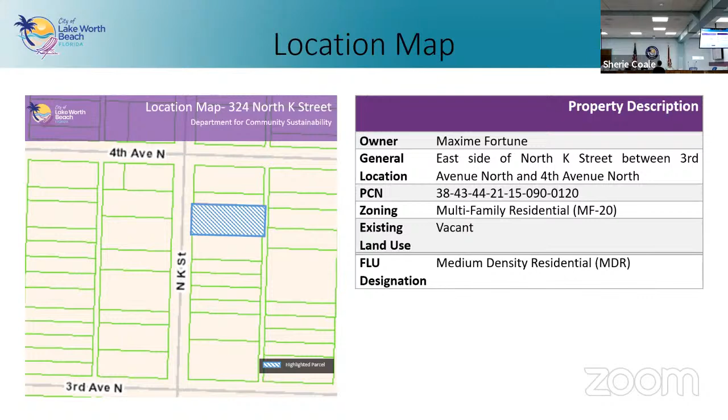Here's our proposed site plan. You can see the layout of the driveway, garage, home, and then pool. The pool is technically not part of this; that would be a later permit.

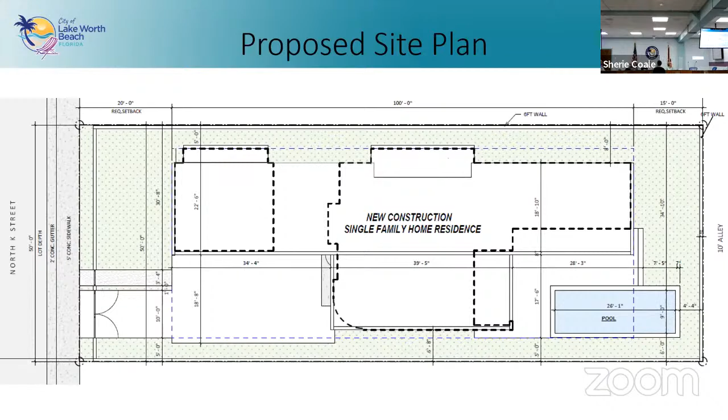Here's our streetscape. You can see that the proposed home is taller than the immediate neighbors. Most of those are one-story houses, but it is similar in height to other two-story buildings down the street, as well as two two-story buildings directly across the street from it.

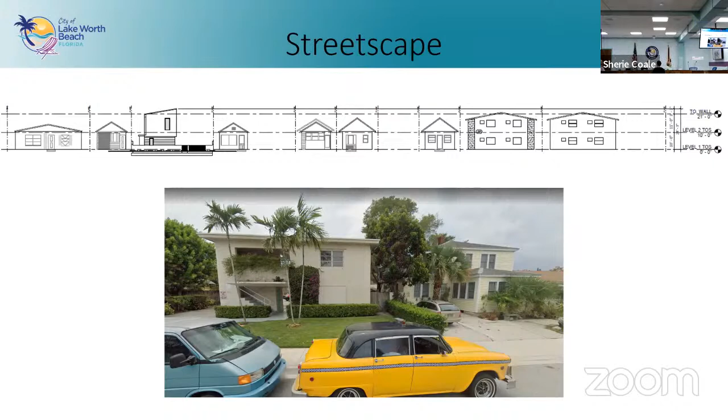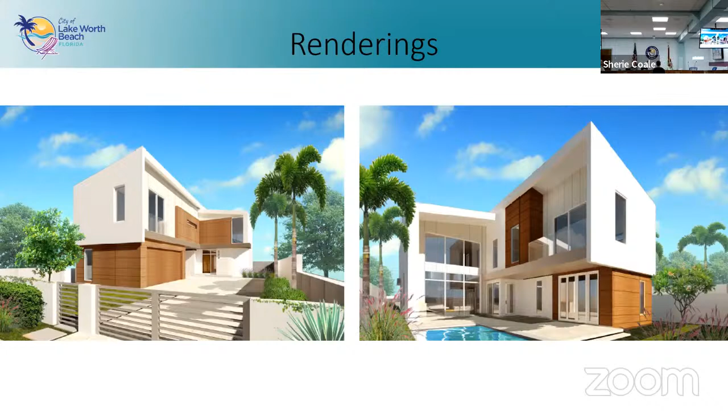Here are our renderings. You can see it's a very modern structure. As the applicants described, they're going for a contemporary rendition of a mid-century style. Here are our elevations, showing the front and the rear, and our side elevations there.

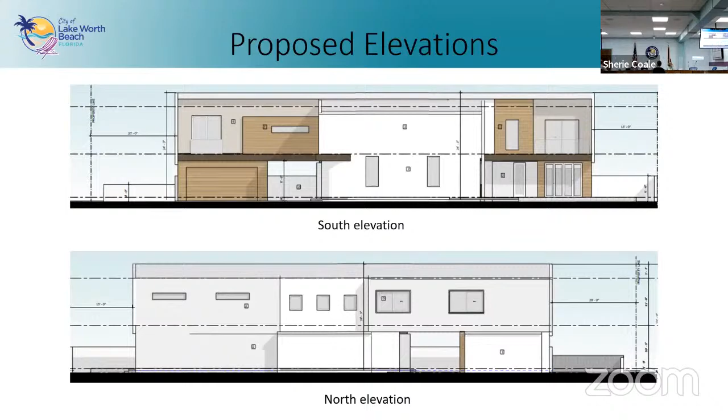For zoning, it's consistent with all of our site data requirements, except for the maximum floor area ratio. The applicants have chosen to utilize the sustainable bonus program to get some additional FAR.

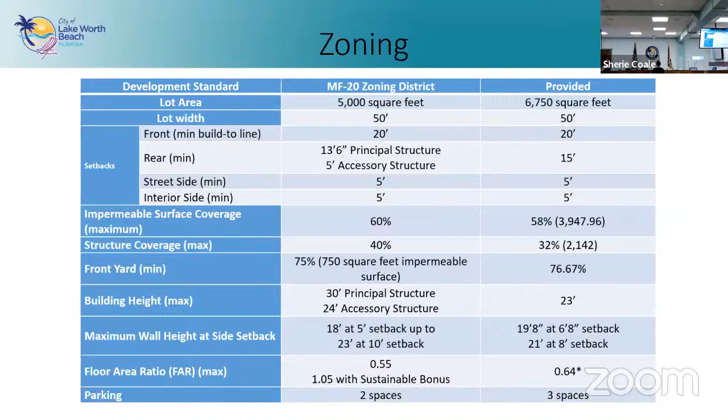So how that works for us in the MF20 zoning district, where this property is, applicants can get an additional 0.5 FAR through the sustainable bonus incentive program.

Based on our calculations of the additional square feet requested, the required award value is just over $4,700. They must pay 50% of that to the city, and the remaining 50% could be provided through qualifying improvements or paying the rest of the fee. Per the applicants, they are choosing to pay the full fee to the city.

Getting into our new construction guidelines, the building is a contemporary rendition of a mid-mod. For things like the roof, they're choosing this skillion and lean-to shape, which is compatible with the style and helps it fit better with the front gabled structures nearby.

The height, as we've talked about, is taller than a lot of the immediately adjacent buildings, but it's not unusual for this block. There are plenty of other similarly sized two-story buildings nearby.

In terms of fenestration, in general they're doing okay, but staff has added a condition of approval to add 2 additional windows to the street-facing elevation so it's not so much blank wall facing people as they're going down the street. As for the stucco, it's very common and compatible within the district and for the style they're proposing.

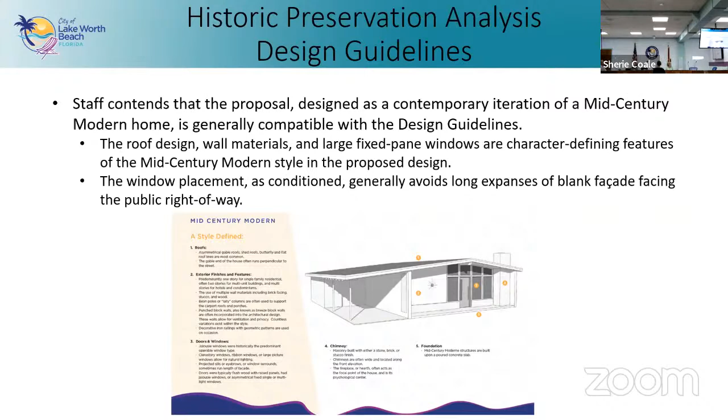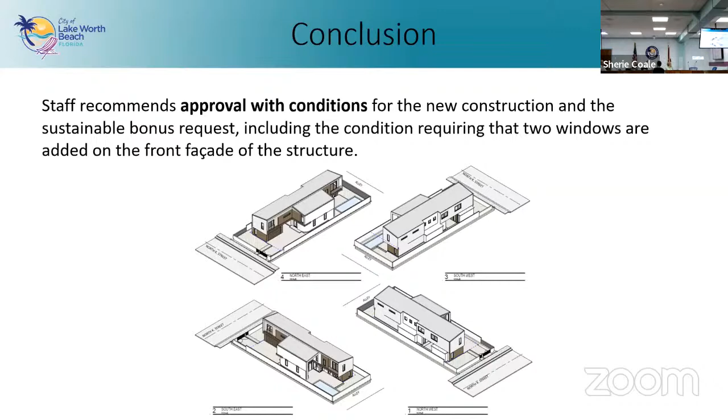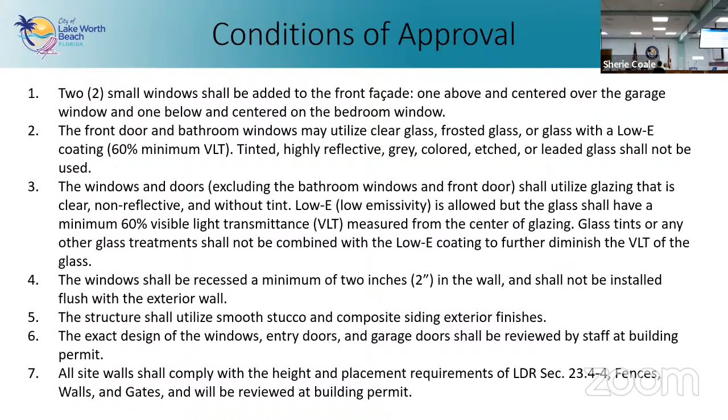Okay, does the applicant have any presentation?

Hi, good evening. Giorgio Antoniassi with Antoniassi Architecture. I'm here representing Maxime Fortune for his single-family home on North K Street.

I just would like to mention that we've done our best to create a thin structure that would mimic the adjacent shotgun-style houses on that same street. We understand that we're not really matching that typology that is apparent on both sides of us.

However, we are providing a face to the mid-century modern multifamily across the street that has a very opaque face as well. So in terms of the harmony of the street, we're kind of matching what's in front of us, and by providing a thin front with a driveway and side entry into a garage...

We managed to try to create a thinner building instead of a full width building that could be on the 20-foot lot line. We think that helps this building interrupt that line of shotgun houses on that street.

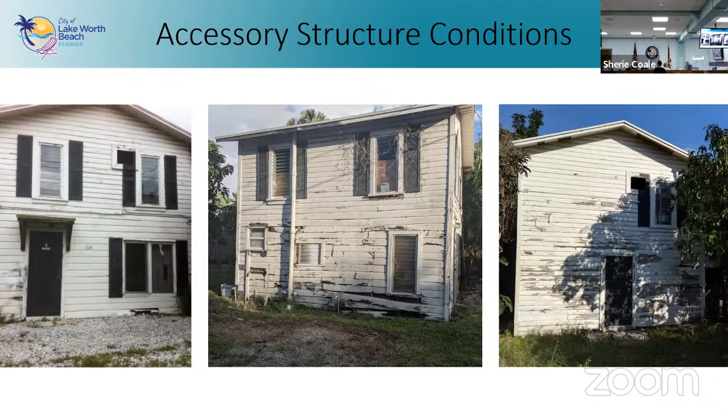This replacement determination made by our building official triggers compliance with the zoning code. To mitigate some of the zoning requirements not met in this historic structure, they're requesting 2 historic waivers. Those waivers would permit the structure not only to exist in its current location, but also its current size, and be functionally reconstructed as it existed for 100 years.

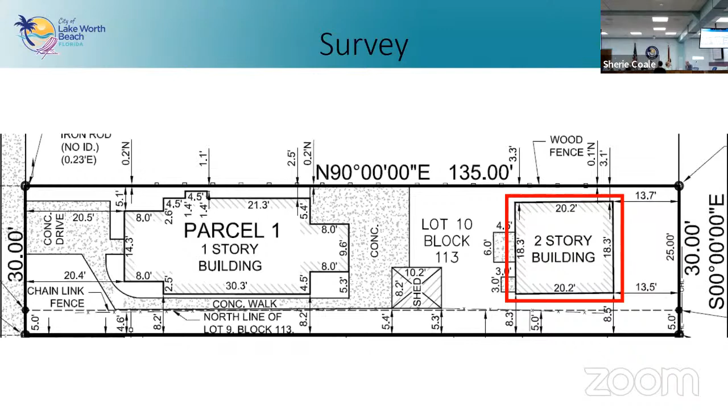If we'll go next, you can see the elevation drawings on this and the next slide. Basically, the structure itself is not changing, it's just the inside of it needs so much work that we need these waivers. The lot is 30 feet wide. Next, please - these are the other 2 elevations.

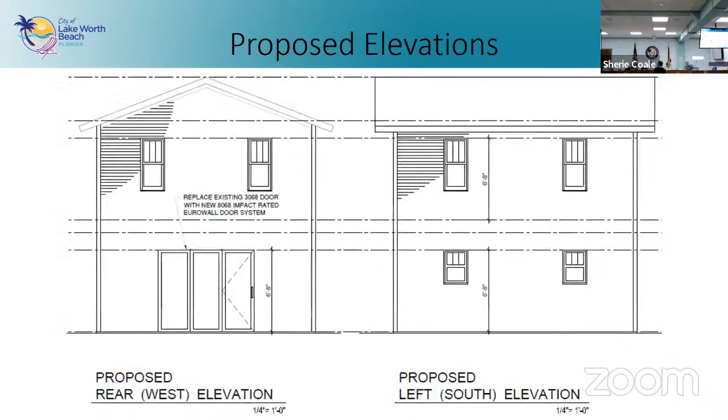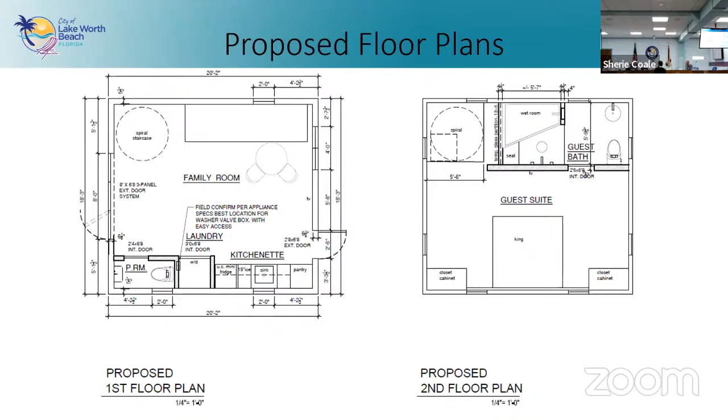If you'll go next again, we've got our floor plans to turn this into a functional guest house, with a kitchenette, guest suites, and bathrooms. So here are our 2 waiver requests, and this is kind of the meat of your decision tonight.

It meets all of the zoning requirements except for the maximum square footage of the structure and that north side setback. Required side setbacks for all 2-story buildings is a minimum of 5 feet in our zoning code. The existing north side setback is 3.1 feet. Accessory structures are currently limited to 40% of the gross square footage of the primary structure, and this existing structure is at 94.4%, largely because of that second story that has always existed.

I will add that there have been cases where the waiver didn't exist and people wanted to reconstruct something, so what they did is connect it with a breezeway. The waiver allows it to be reconstructed as a functionally distinct structure as it was historically. They could rebuild, maybe not in this exact location, but if the waivers aren't granted, it'll be demolished. It doesn't have to be demolished.

They're rebuilding the building. It will have to be demolished if you don't grant the waivers. So what we're talking about is getting these waivers so they can do what we consider a functional reconstruction, where they're not tearing the whole building down and starting fresh. It basically means that over 50% of that structure interiorly will have to be replaced because of water damage, rot, that sort of stuff.

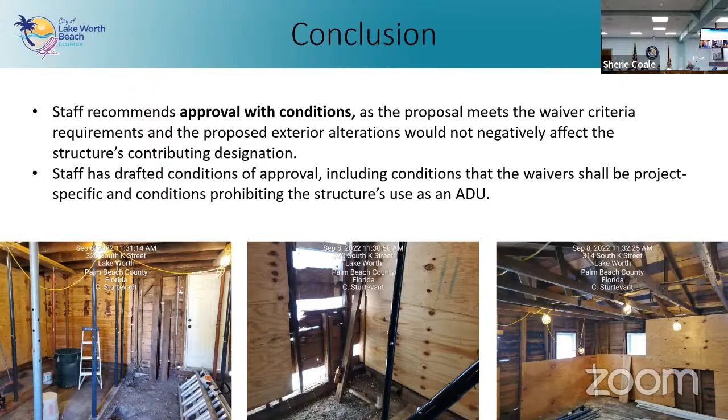So I see there are conditions of approval specific to this particular project, not just boilerplate. Does the applicant have any issues? I don't believe the applicant is here tonight, but most of the conditions addressing doors, windows, and all of that—they've been privy to. Those were part of the previous approval given prior to this structural issue coming to light, so they're amenable to all of those.

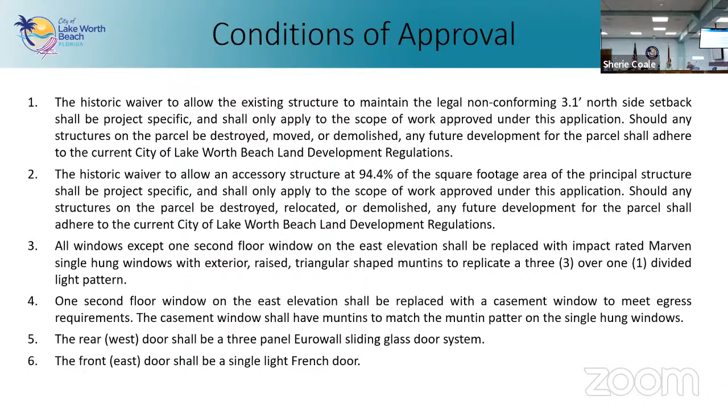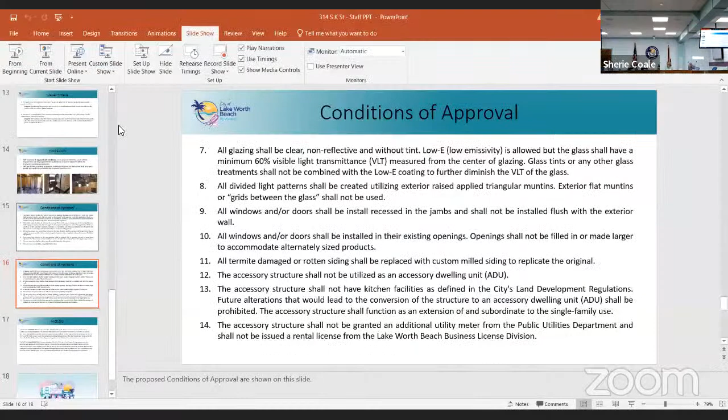Okay, do we have any other comments or questions on the project? What is the full structure then? Yeah, that front structure, you might recall, went before the HRPB for rehabilitation in 2017, maybe. 30-foot wide, yeah.

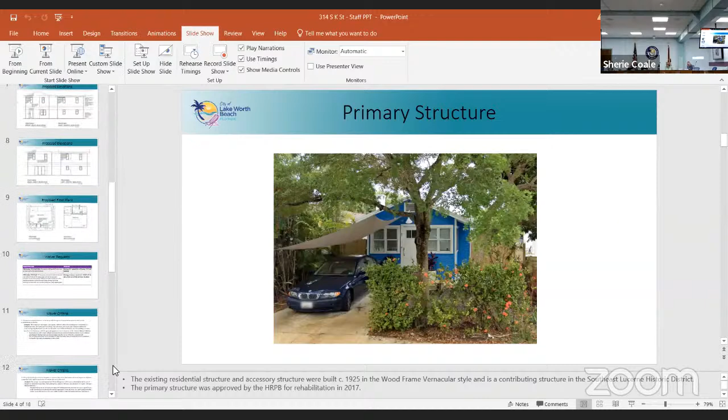And the floor level of the rear living space downstairs—is that anywhere near what it should be? No, I'm not talking about bringing it up to whatever the requirement is, but do we have any idea? It looks like it's sitting almost below grade.

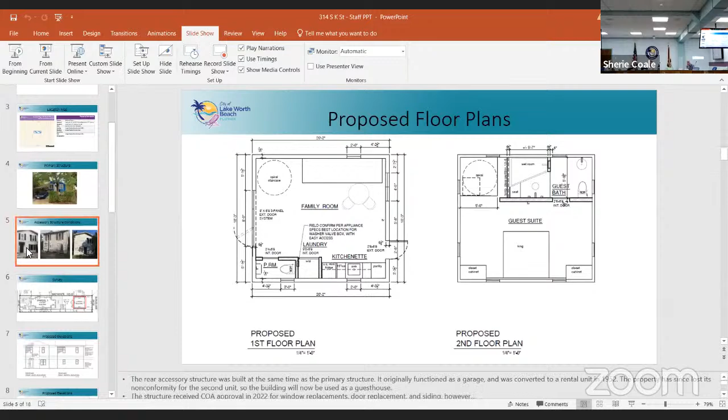Staff is recommending that we approve it. If they have a finished floor elevation issue, they would be required to retain the doors in their same position, then step up into the house. Obviously the doors have to open outwards in Florida. But there's a flood adaptation where you internally adapt the structure and raise the internal floor to meet habitable space while keeping the exterior facade. It could just need a little extra lip, with the door opening outwards below the finished floor elevation. That's an easy adaptation we can handle at permitting.

Any other questions or comments? No. All right, do we have a motion?

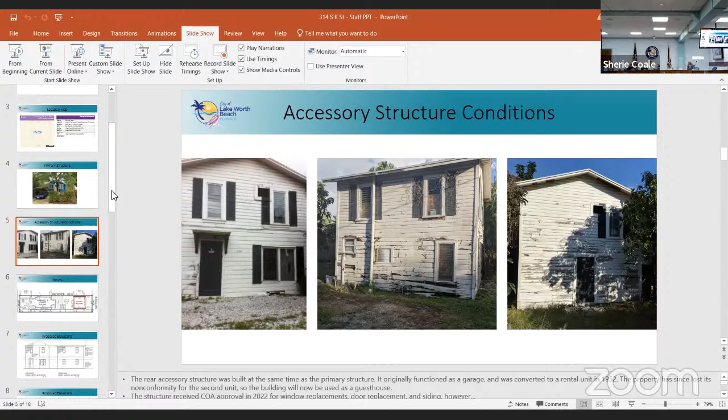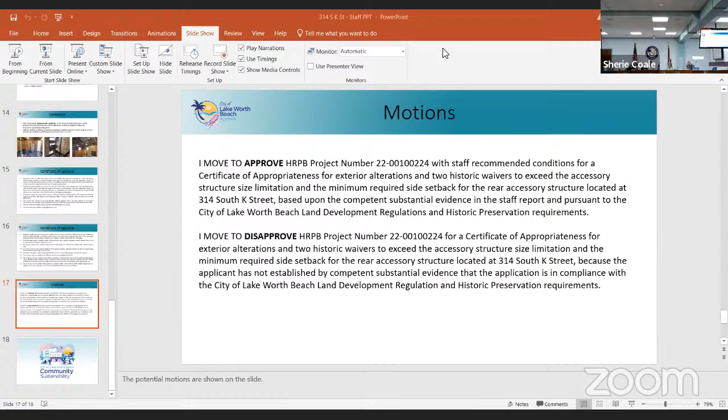I move to approve HRPB project number 22-00100224 with staff recommendation, recommended conditions, with certificate of appropriateness for exterior alterations and two historic waivers to exceed the accessory structure size limitation and the minimum required side setback for the rear accessory structure located at 314 South K Street, based upon competent substantial evidence in the staff report pursuant to the City of Lake Worth Beach Land Development Regulations and Historic Preservation requirements. We have a second.

Second. Good, we have a motion and a second. All those in favor say aye. Aye. Opposed, nay. Nay. One opposed and four approving, so it passes.

HRPB project number 22001003, for consideration of a certificate of appropriateness for the demolition of existing structures and construction of a new 2,890 square foot single family house at 338 Cornell Drive, West Lot. Subject property is located in the single family residential zoning district and has a future land use of single family residential. Property is a contributing resource in the College Park National and Local Historic District.

Awesome, so once again this is Annie Greening, Senior Preservation Planner for the City of Lake Worth Beach. So our property here, you may remember it has come before for conceptual review. This is on Cornell near North Dixie Highway. If you could go to the next slide, Erin.

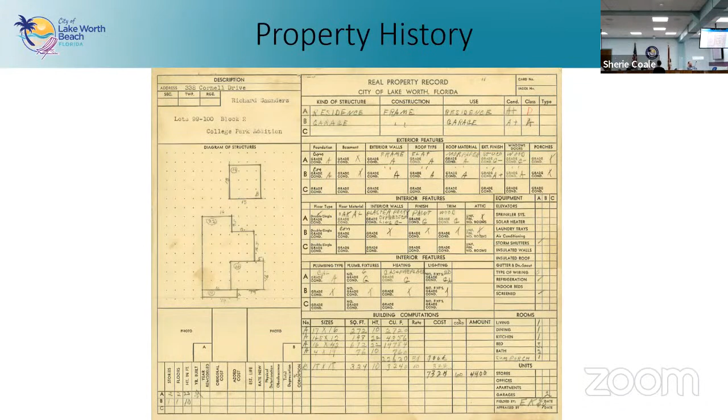So some property history, since this is a demolition and new construction, we'll go into a little more detail. College Park was originally platted in 1924. This property was platted as four 25-foot lots, and the existing house and garage were built in 1925 in the mission style. This was one of the most common styles in the College Park district in that era.

Like I said, it came before you all in September 2022 for conceptual review, and in October, the applicants did receive a zoning letter deeming the request to split the parcel into two 50-foot parcels, subject to your approval of the demolition and new construction.

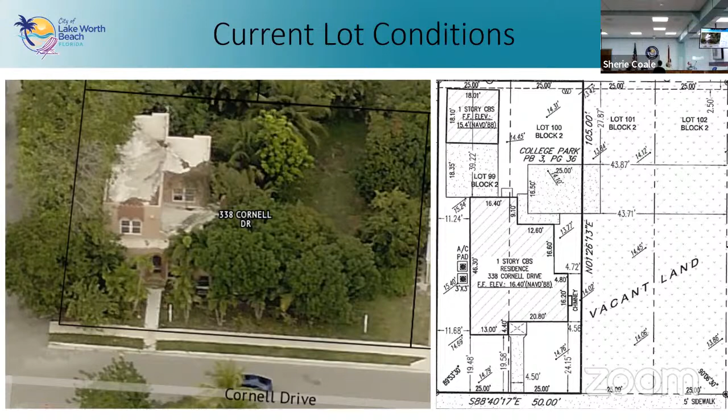So we are here. You can see kind of a 3D view as well as the existing survey for the property showing the structure and the garage in the rear. And so next, please, Erin.

So we're going to walk through just kind of the highlights of the demolition request. These were covered in the staff report as well as the applicant's justification statement. But these structures at 338 Cornell are contributing to the College Park National District. Staff has contended that they are unlikely to qualify individually as individual landmarks. And there are other remaining examples of this style in the city, so these aren't the one and only that we have here.

But next slide, please. Despite the current state of the building, staff believe that they do still contribute to the historic character of the district that they're in. They represent not only these styles of the era, but the Florida land boom and the associated development that happened in Lake Worth and throughout the state during that time. We do believe that the loss of these structures would be a significant loss for the district. This is a prominent residence, 2-story on a somewhat prominent location.

The applicant has agreed to document the building prior to demolition if you all approve that demolition request, so that we have record for the future of what was once here. And staff do believe that retaining the structure would provide an opportunity to study local history, architecture, and design, which is one of our criteria that we would like you all to consider for this demolition.

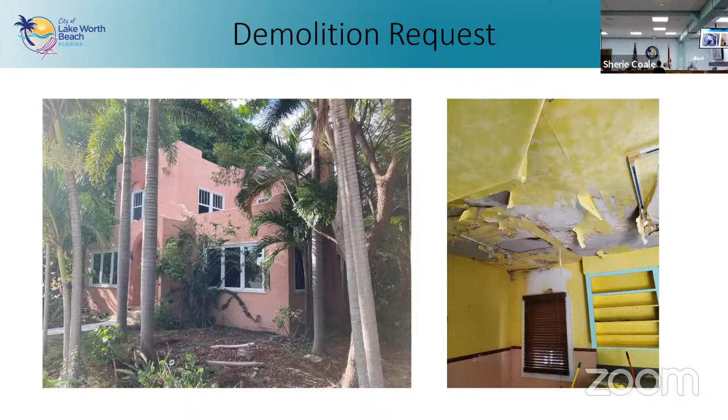So repair would likely be expensive, and staff does refer or defer to our applicants regarding issues of economic return or economic hardship. Those are considerations in your demolition criteria. But at this point, no specific evidence regarding either of those economic arguments has been submitted.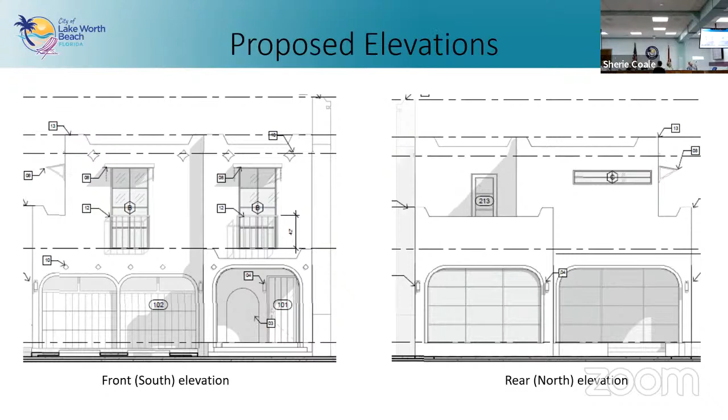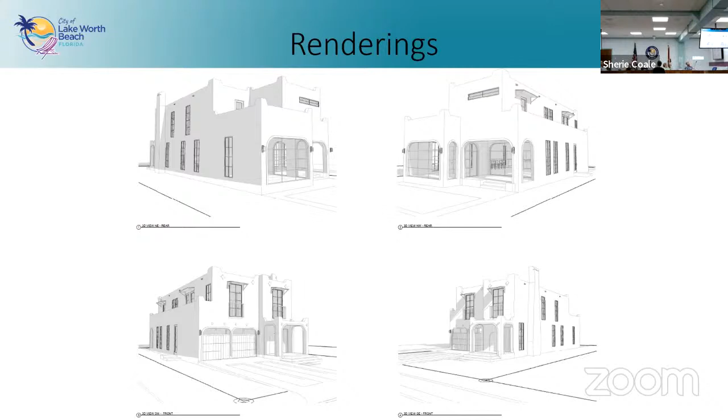Additionally, we wanted to note in this zoning section real quick, while the site does meet its parking requirements based on the driveway spaces, the size of the garage internally is not actually long enough to meet our parking requirements. So we have added a condition of approval as well to increase the length of that parking garage so you could fit a whole car in.

Yeah. Okay, so moving again back to preservation out of zoning. We have our additional guidelines for new construction.

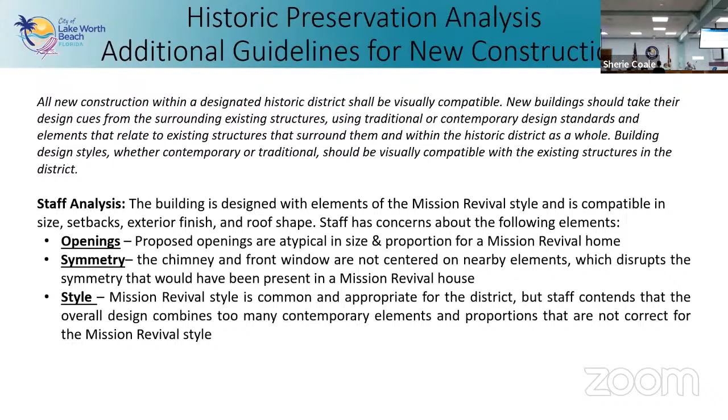Staff believes that this building is designed with elements of the Mission Revival style, the same style as the building it's replacing. It's compatible with many elements—size, setbacks, exterior finish, roof shapes—but we have concerns about size and proportion of openings, the symmetry of certain elements such as the chimney and some windows, as well as the style overall. Staff feels like it combines too many contemporary elements to feel authentic and true to the Mission Revival style.

If you go one more slide, Erin, we've got our design guidelines analysis that gets a little more detailed. Like we've talked about, we're seeking truth in architecture—emulating a single style and incorporating all of the correct window proportions, massing, symmetry, and materials, to make it feel authentically the style it's supposed to be.

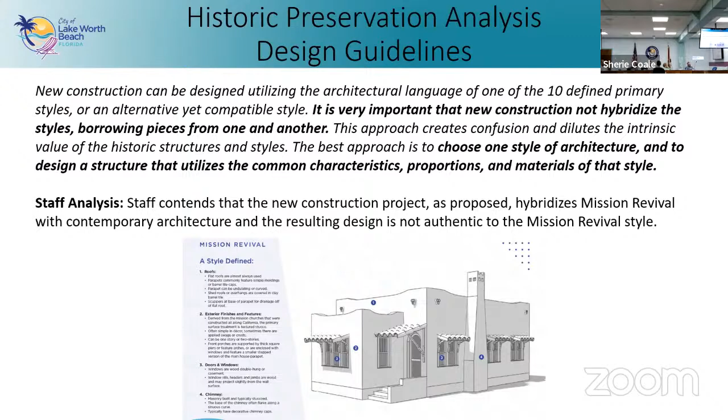If we go to the next slide, Erin, these are some of staff's concerns. Windows are out of proportion—historically, windows weren't floor to ceiling, those would have been doors. The first and second stories were the same height as each other, which gives a top-heavy appearance and is not how buildings were historically constructed. The thinness of the parapet on the entry porch was also atypical.

We also had some concerns with the balcony and how it affected symmetry on the front of the building. So we suggested shifting some elements so that the balcony is not visible from the front. If you go to the next slide.

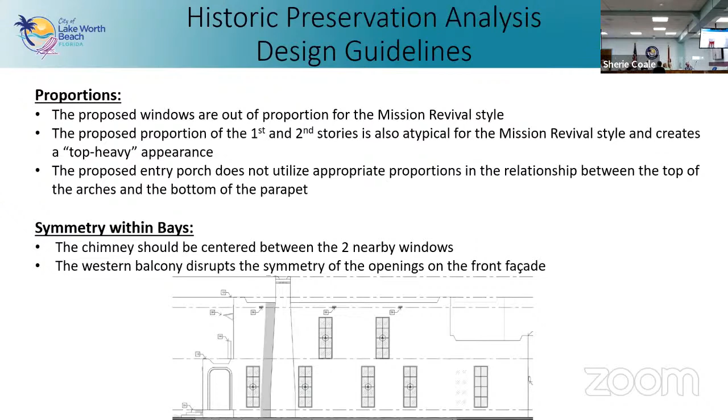We also had some questions about the muntin patterns—again, atypical for the style they're emulating. And then the arches—most of them are this kind of flat arch with rounding at the corners. This is evident in this style sometimes in vehicular uses, like carports or garages, but we had concerns with that shape for the entry porch and suggested using smaller rounded arches instead. This is a rough sketch just to give you the idea of what we were looking for there.

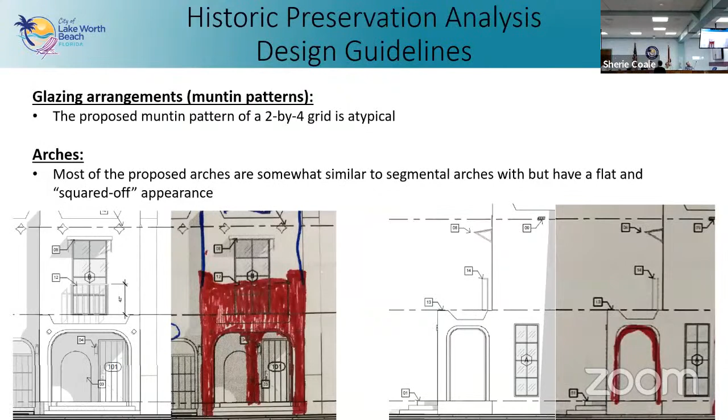If you'll go to the next slide, Erin. I wanted to add that part of it is to make the balcony a functional balcony by making the front element more prominent, which would have been more historically typical than what was provided by the applicant. Even if they didn't want to make it so you could literally walk out on it, it should emulate what would have been a functional balcony.

The applicant did provide staff with some revised drawings this morning and indicated they will potentially show some more revisions tonight as well. Staff hasn't had the opportunity to do a full review of them, and I know they weren't included in your packet either, but they do seem to start to address issues of proportions and the front porch parapet, that sort of thing.

So it is encouraging. If you'll go to the next slide, Erin, we do have continued concerns about a few things. The width between the arches on that front porch is still really thin and feels a bit off. The arch on the other side of that porch isn't matching. And we had some questions about that large arched door on the west elevation, some asymmetry in the muntins, and it seems to be lacking a stoop to walk out on.

The applicant has been amenable to start making some of these revisions, but staff still believe we need some more time—the applicant might need some more time, and you all might need some more time—to get fully revised drawings in for our review and your review.

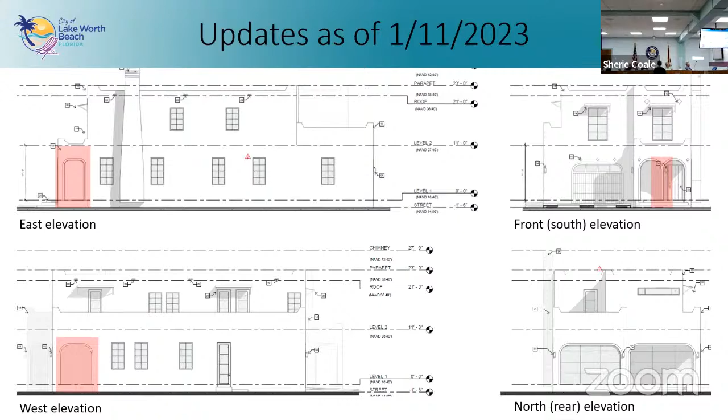So if you'll go next, Erin, we recommend continuing this project to another meeting. This just gives everyone a little more time to implement some of these revisions, whether that's staff comments or any comments you all might have tonight. We're particularly concerned about getting this one right since it's potentially replacing a National Register listed building. If we're replacing it with the style that was here originally, we want to do it right.

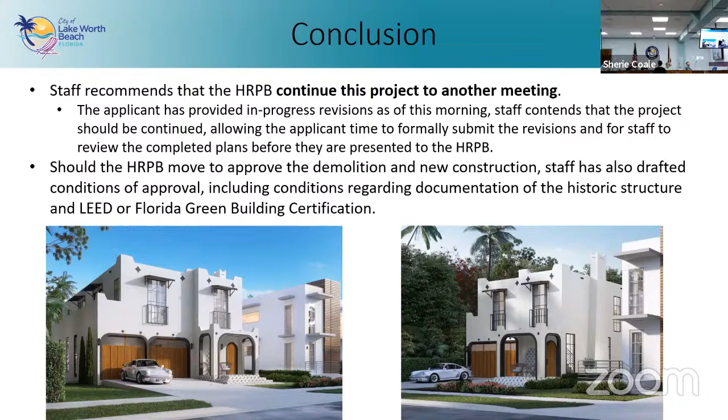So if you all so move, we do have conditions of approval that we've also included that could be added or edited. But we had those there in case you all felt comfortable approving it tonight, though we do recommend continuing it. As usual, the next slides just have our conditions of approval as well as our draft motions.

Yes, but it's not quite there yet. We've got to give the applicant a chance. No, you'll get there. Okay.

Our applicant's representative is here, and the architect is also here on Zoom tonight.

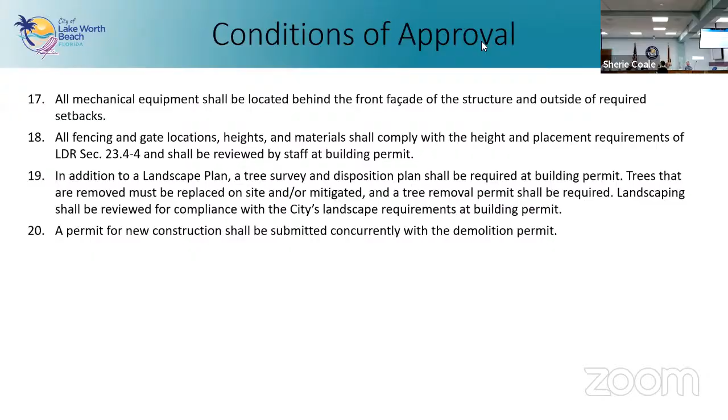Before we move forward, are we debating or discussing the demolition and this replacement at the same time, or separately? They're concurrent. So in order to approve the new construction, you have to approve the demolition. And it is a unique case when there is a National District - you do have additional authority because it rises to that level.

Okay, we'll move forward with the applicant. Wes, did you have a PowerPoint presentation? No, I didn't. Okay, good, we'll just refer to the staff report. We need - Stephen has some graphics too he can share. Hold on one second, let me just pull that up.

Good evening, how are you? Happy New Year. Wes Blackman, AICP Certified Urban Planner with CWB Associates, here representing and on behalf of Emerald Isle Home Builders, who is the owner of the property. This is an application for demolition and new construction.

After hearing the staff report, we agree - we're on the same page with staff concerning consistency with the comprehensive plan and meeting the standards of the SFR zoning district. We're doing a Florida Green Building certification that allows for a small increase in FAR. We also agree with the findings and suggestions in the report for new construction in historic districts, and we take the comments from staff on architecture style very seriously.

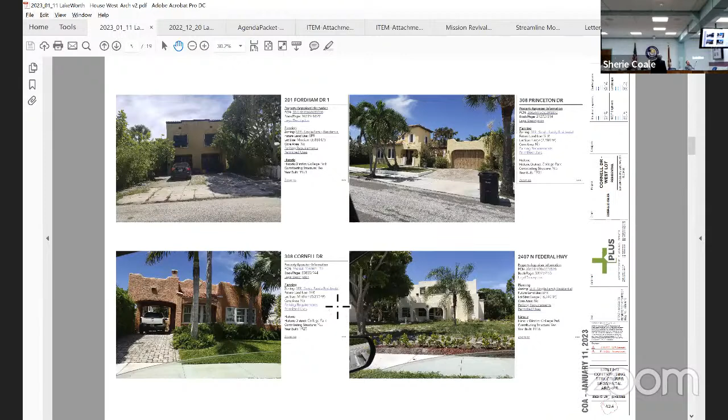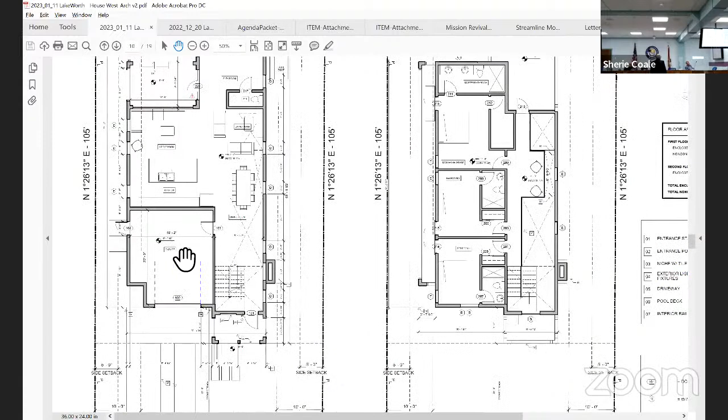Precedent in terms of our design decisions, precedent in terms of the arches that were used in Mission Revival, the site plan, the floor plan initially the way we had it, the floor plan how we have changed it. So if you can see, it shows the notch, making it a 1-car garage, pushing this back to have the 20 feet as per your request.

So that's the change in the plan. Basically, again, the initial proposal that we had, the studies that we did with the arches as well as a proposal. The new, and I guess the most updated versions, are these. So we've changed the proportions of the windows as per your request. We increased the size of the parapet, the space, the parapet. We pushed back the balcony, creating that notch. We made it a 1-car garage, centering the window as well.

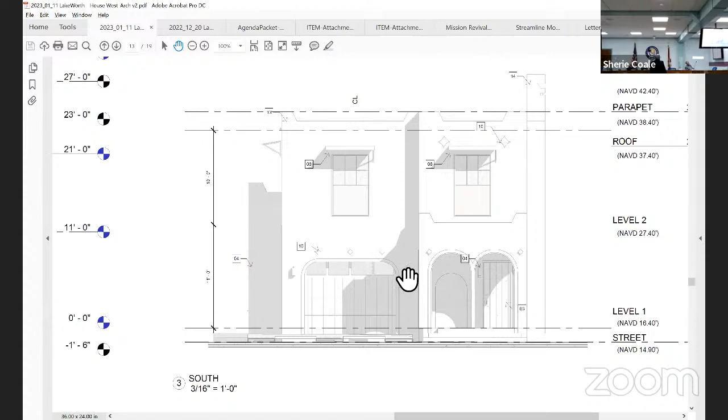Something that you didn't have updated was the arch on the corner has that same arch. What else? I think those were all the updates. Centering of the chimney, a lot of miscellaneous things, and changing the centering of the chimney, basically, and in between the windows.

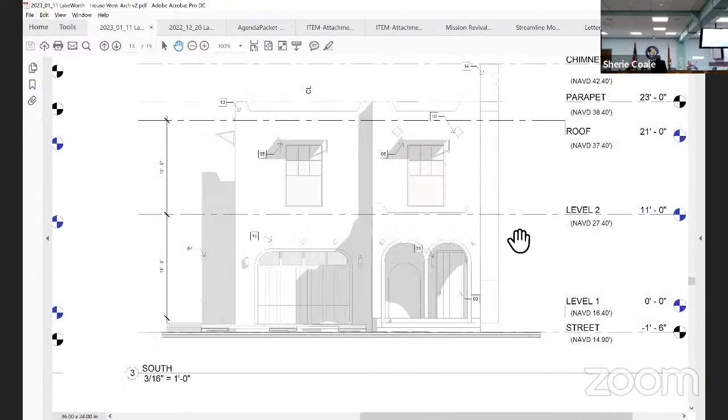And you had a concern about the double section there. Yeah, so the double arch was something that we had said would be a good alternative. It would give kind of a consistent arch size throughout. It's just that connector bit between the two of them is really thin, which is a bit atypical. So if it was widened a bit, it would make the arches smaller, but it would give the sense of weight that would be historic. 6, 8 inches a foot.

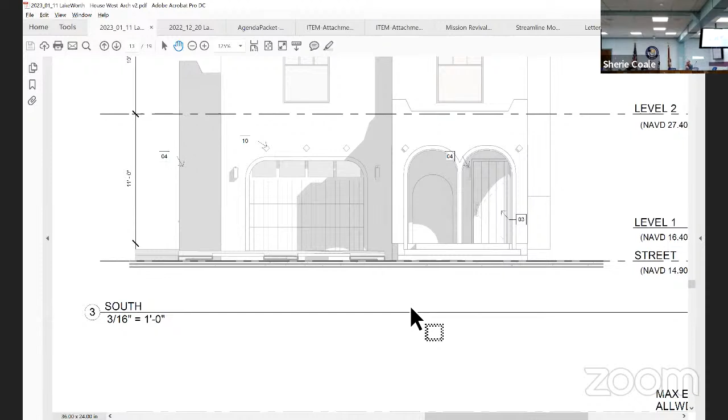We need to, see, this is the problem: it's hard to design at a meeting. So if you guys are comfortable with staff making those decisions, what we would say is you would concur with staff's direction that it needs more weight, and then we would have to work it out with them, because there might be something else that comes up in the design. And then we're like, well, we could add more weight, but then that makes that weird, and then we got to change that. So this is part of where we get the recommendation to make the changes, continue, and come back.

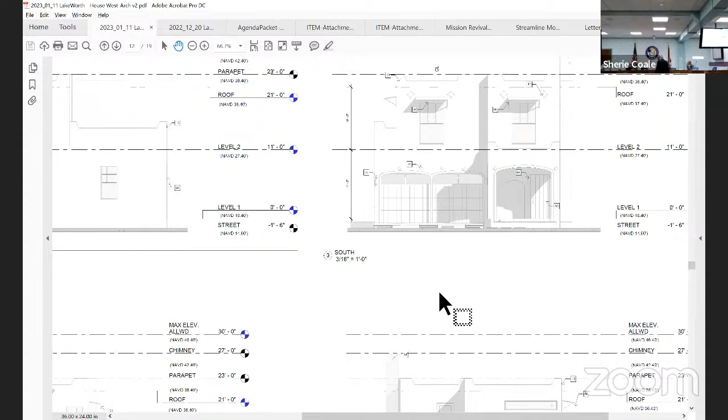But I understand the applicant has a time crunch, so push down the road. I will say that you all gave them design direction, and we gave them very specific design direction at the pre-application meetings that we wanted true to form and style. I think we were shocked when it came back in and we felt there were not substantial changes from what you already saw at conceptual. We kind of felt unheard. So we wanted to make sure when we got it, that we got it right before you. So if you all are comfortable and you feel like what they've done has evolved it enough that we can tweak it, and you want to give staff authority for final approval on the design, that's up to you. Or you can do it the other way.

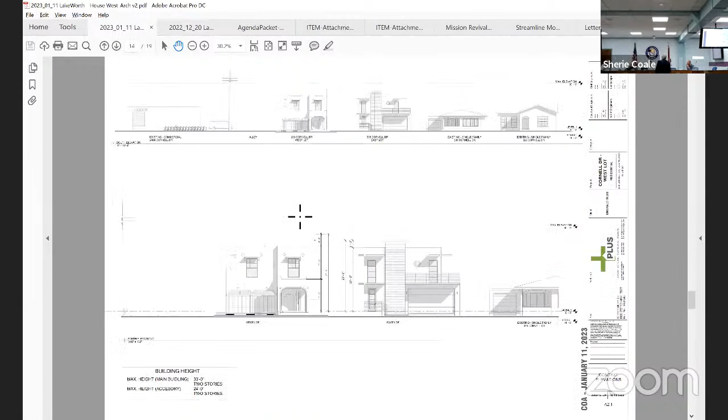Well, the only thing I put that up is that demolition was connected to it. Yeah, I believe Wes tonight is asking for the demolition to be separate, which is not in our code. Well, what we would like is the demolition COA to be approved, but then you shift your authority to staff to work out the details with the final architecture and the direction we're headed now. Well, yeah, I would like to discuss the demolition, definitely. I think I'm totally confident in staff's ability to work with the applicant and to work something out, but I still want to see it coming back, definitely.

But for me personally, I would like to see what our options are as far as this demolition approval. I have a real concern about that, and I want to know. That's what I was going to recommend. I think the demolition is really a key central conversation, before we start talking about a house that's replacing a house that's still there.

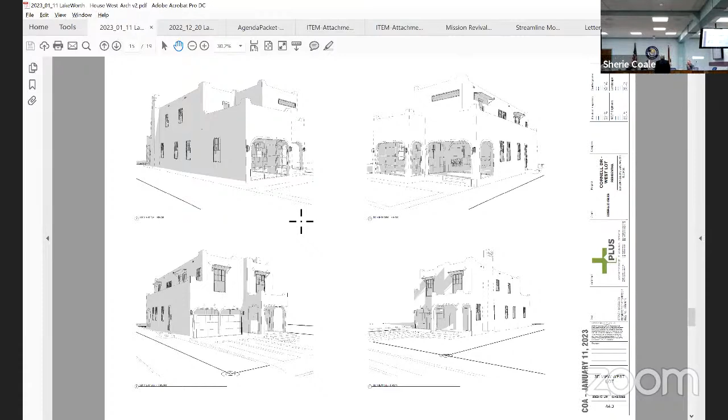Well, let's, if you guys are, before you get into board discussion, I know we have some public comment. If you want to hear public comment before you get into board discussion. Yes, thank you so much.

Good evening, my name is Leisha O'Hara. I live at 331 Cornell Drive. I'm not directly across from the house that you all have been discussing, I'm like a little bit catty-corner, but I see it every day, and I have been seeing it every day for over 20 years. So I know a lot about the house, even though I've never lived there. First of all, I want to thank all of you and also your city staff, because I know how much work you all put into this with very little thanks and no compensation for all of you guys. And I can see from what you have presented how much work has been done, with all the details and all the thought that has gone into the new buildings.

I've heard Mr. Blackman discuss all the details, tweaking it, et cetera, and I appreciate all the work that everyone has done.

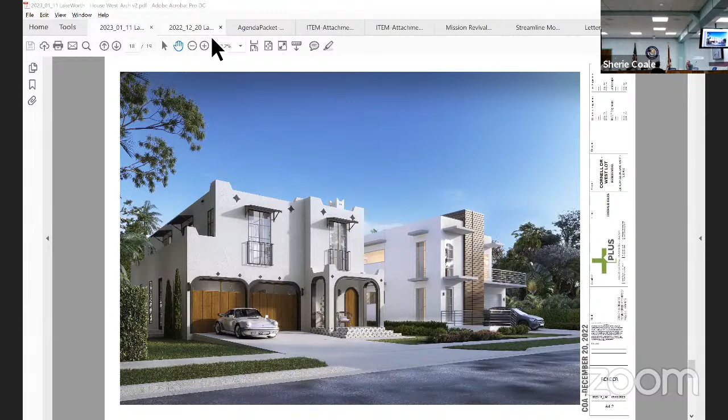But to me, the real issue is what our neighborhood is all about. That street does not have anything modern going on. I understand some people might feel that's a blend of the historical style and the new style. In my mind, it is not, but I'm a diehard, so I apologize if that's offensive. The real issue is whether or not the house that has been standing there since 1925 should be demolished.

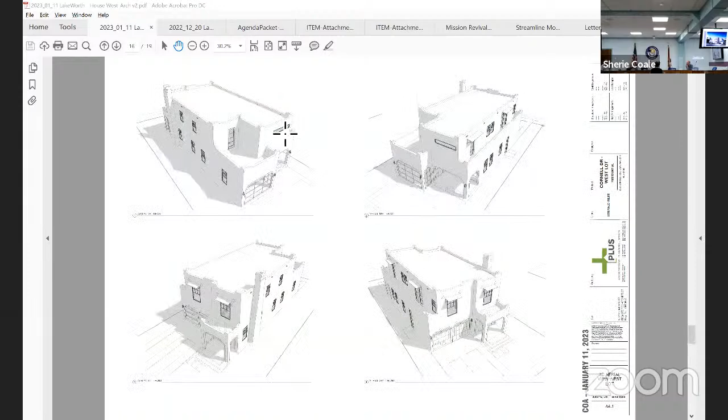The new owner, the developer, bought that property knowing it was historical, and they've chosen to let it go into more disrepair than when it stood there vacant. The old owners at least had caretakers coming in, making sure the moisture level was okay, with the AC running. It has a new air conditioning system, a new electrical panel. The windows are fairly new because there was water damage from the roof.

I live in a historical home myself, and I know what a sucker for money these homes are. You have to love these homes to want to buy one and get yourself into that kind of debt and that kind of work.

That house has been tented recently for termites. My house has been tented for termites too. My house has had water damage from roof repairs. I have repaired all those things, and I believe truly that house can be brought back to just a beautiful gem for this neighborhood.

I really do. And the interior of the home, which you have not seen, I've had the pleasure of walking through. Yes, it has a lot of damage, but it has things you can't even get anymore, like the Cuban tile floors. When you walk in, to the left there's broken tile Cuban style that is very, very rare, even in our neighborhood. There's a beautiful fireplace, arched doorways - those are all things that contribute to the beauty and uniqueness of the home.

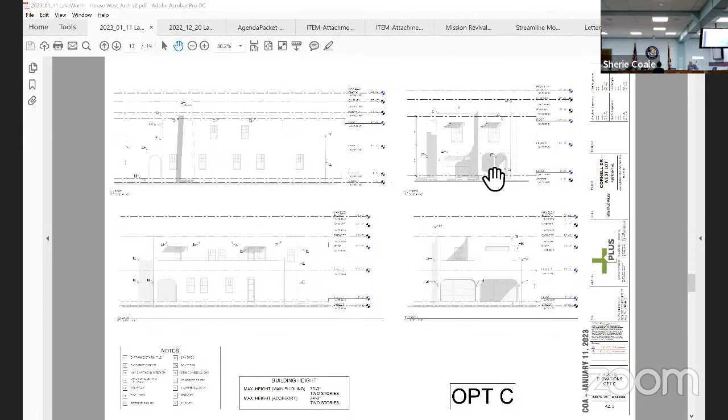The thing is that the house is unique and contributes to the historical standing of College Park. That's why people like me have bought into these homes that are sucking the money and life out of us, and we love these homes.

Since this house has been purchased by the new owner, the builder, there's no caretaker. The yard rarely gets even a mowing. There's all kinds of trash in the alleyway and in the yard of that house, because it's directly behind a liquor store. There are homeless people living in that dilapidated garage right now - I took a picture of one of them this morning walking the dogs. I see them every day. There are drunks there, and the owners don't care.

I understand this is all about money for them. They bought the land and wanted, from the beginning, to demolish that house and build these two big houses and make a lot of money. I understand and respect the value of money and that it's a business decision for them, but I don't believe it's appropriate to demolish a home like that.

It has damage, yes, but it can be repaired and can be a beautiful home again. I don't believe it's something that should be allowed, because it's not the same as building these modern style homes on a vacant lot where a house has already been demolished.

You have the power today to say yay or nay to demolishing this beautiful home, and I'm asking that you deny them the right to demolish this house. If I had had the money to buy the house when it was on sale, I would have done it. It's just that my house is sucking my money. I couldn't afford to fix up a second house. I wish that someone who treasures old architecture and old homes had bought that house and that we were not in this predicament. I know it's a difficult decision for everyone, and I understand the builder is not going to be happy about this, but I am really thinking that what they are proposing is not in harmony with what is on the rest of that street. There are no modern buildings like that and nothing of that size.

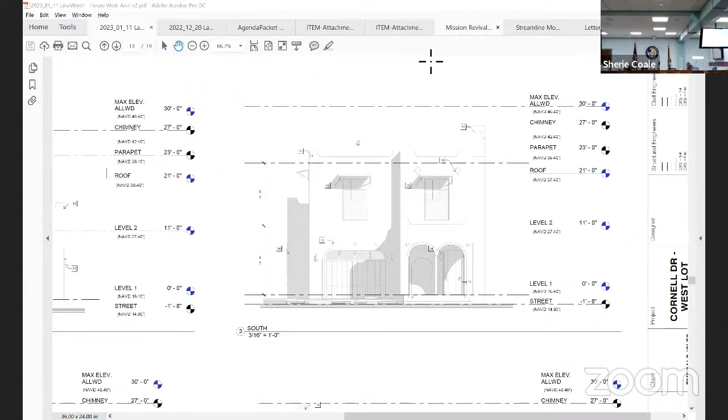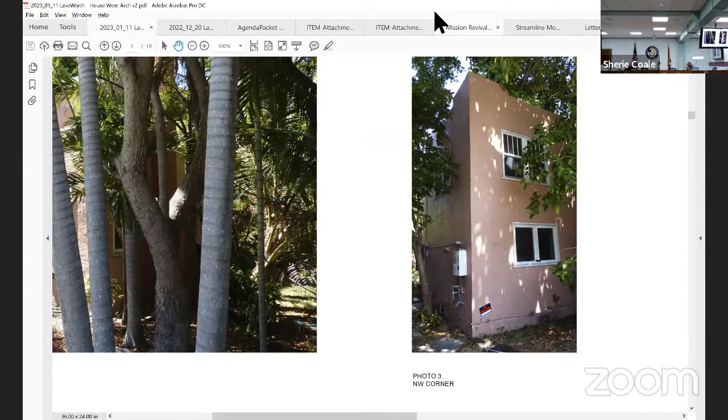I don't see anything in the engineering that says it is unable to be brought back, or that a demolition order could be legal. Yes, it's unsafe as it stands now, but it remains safe to address. So I want to discuss the demolition first, and take it from there, because anything I've seen so far, I would not be inclined to grant a demolition order. I would be inclined to separate the lots and allow them to build a new structure on the second lot, because I understand it doesn't quite comply with the setbacks and such — that's a waiver we can discuss. So that the owner has some direction from the board, that's the way I'm looking at it.

No, I agree, and I think that we have to have a serious discussion about the proposed demolition of it. It's a pretty substantial building. I agree, I think it looks like it's still in the kind of shape where it could be restored.

I would wonder if we could suggest having a professional come in that does that type of restoration and actually assess it to see what it would take to have the building restored, because I'm not there yet as far as saying that it should be demolished.

And if we have it within our power, I think we need to basically say that they have to maintain the building and make sure that it doesn't deteriorate further, and they need to secure the property while this is going on. If that's not what's happening now, absolutely, we can definitely follow up with that.

I think though, if you wanted to consider the demolition of the garage structure versus the house as two separate items, that might be something, because the garage is basically... Would the board want to look at that and say the garage must be restored and reconstructed like it was, and that it's in somebody's backyard? I know that's pushing it, it's part of the property. And the garage is accessible from the alley. Well, is that something that needs to happen in order for it to maintain its status?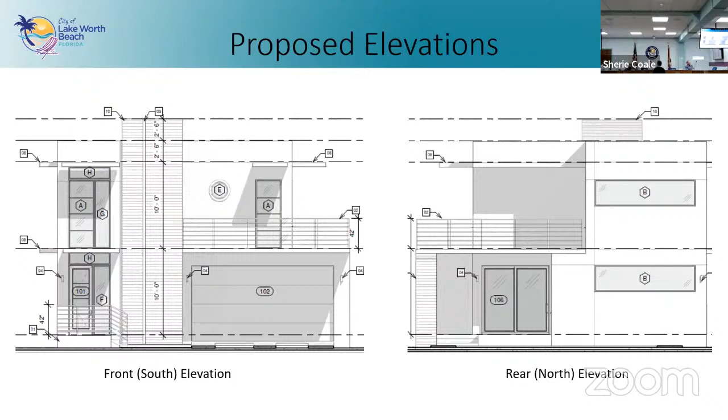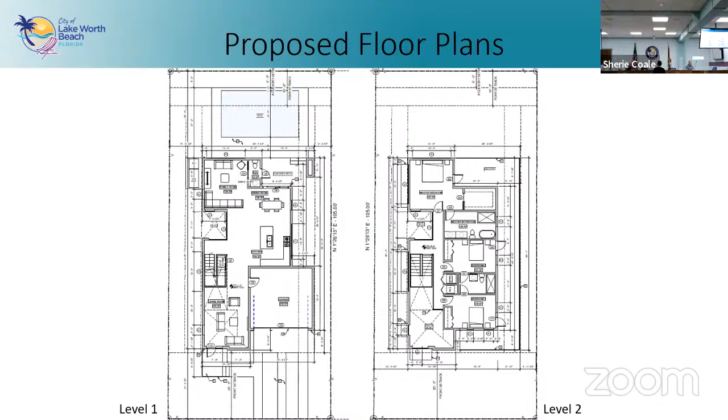As we've discussed, that is their right. This is one of the styles discussed in our design guidelines, and so staff evaluated it based on that style that they chose. Next, please, so we've got our front and rear elevations, and if you'll go again, we've got our floor plans just showing that interior space, and our renderings are on the next slide, giving us a 3D view.

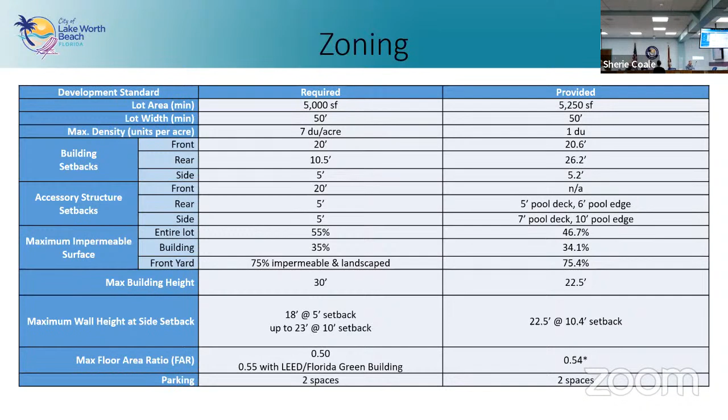Okay, if you'll go forward again, Aaron. So just like the last one, this meets all of the zoning requirements except for that FAR. And once again, they are getting that additional 0.05 of FAR accounted for through LEED certification or Florida Green Building certification, so they are accounting for all of those concerns. Like the last one, similar issues with the interior garage space, so we asked them and we conditioned that they would increase that interior garage space to fit the length of a car.

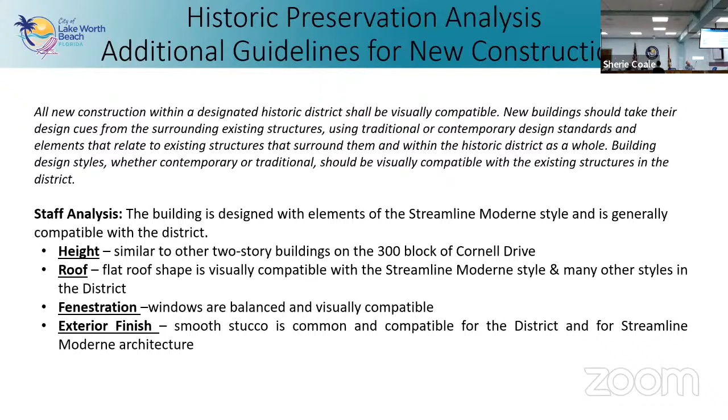Okay, so here we are again at guidelines for new construction. We do contend that this is designed with the elements of Streamline Moderne in an authentic way. It is compatible in height, it is similar to other two-story buildings that are on that same block. The flat roof shape is compatible not only with this style, but with a lot of the other styles that are in the area. The windows are balanced, visually compatible with the style they're going for, and that smooth stucco is common for many styles in that district. We'll go next to our design guidelines.

So it uses materials, form, and detailing that are consistent with the Streamline Moderne style. They've included elements like the porthole window on the facade, that circular window, projecting eyebrows, which are those roof-like elements that project out from the elevations, and detailing that emphasizes horizontality throughout the structure.

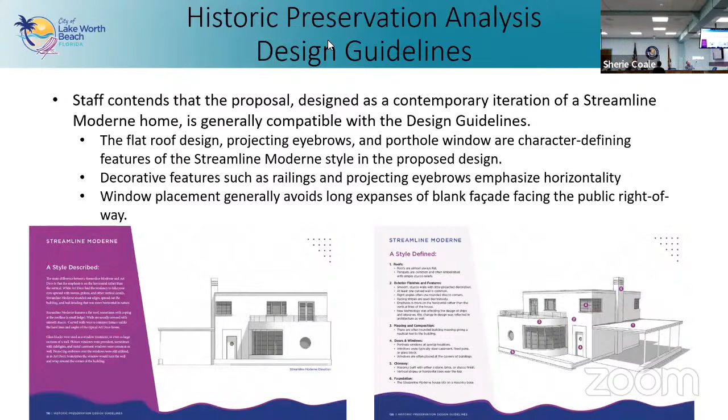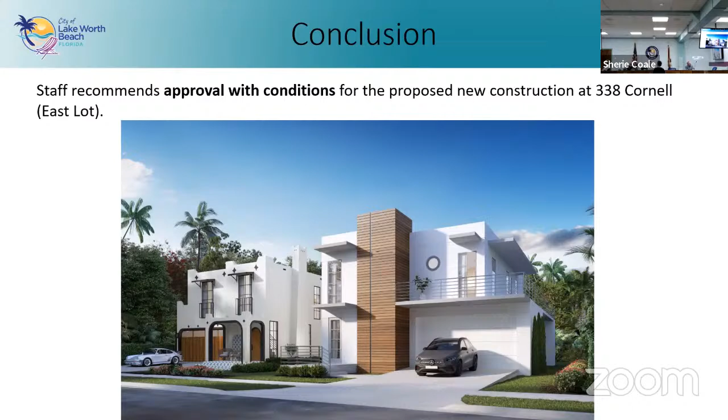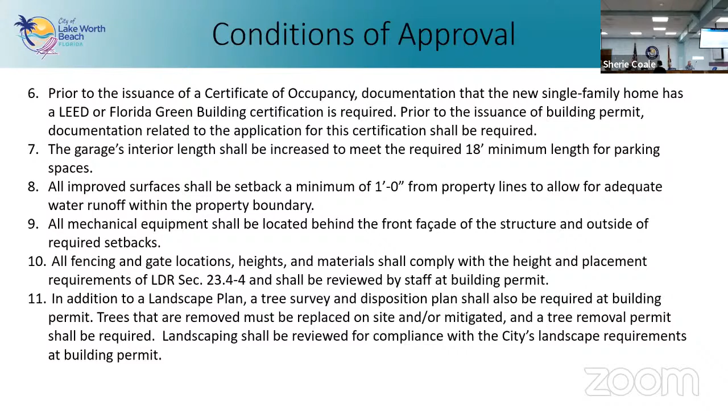Staff does recommend approval with conditions as drafted for the new construction on the east lot. We believe it is generally consistent with the preservation ordinance and our design guidelines as proposed. As always, we've got our conditions of approval on the next slide and our motions at the very end. They're pretty much our standard conditions, with the requirements for green building and that additional space in the garage.

Do we have any further presentation from the applicant? Let's be brief.

We are in 100% agreement with the staff report and find that it is consistent with the comprehensive plan and is a very cohesive design. We are amenable to all the conditions of approval, including the adjustment of the garage size.

Stephen, if you want to chime in too, we did some changes based on September's meeting that talked about the side light, the front door, and other changes that we made to the structure.

Can you hear me? Yeah. Okay.

Yes, as per staff request, we added some side lights at the front entrance. We will move the garage to be 20 feet deep. I believe we worked a little bit on the heights as well, updating some of that.

And any other staff comments we basically addressed. One was providing a little bit more pattern in that feature that sticks out, and the other comment was making both buildings very distinguishable.

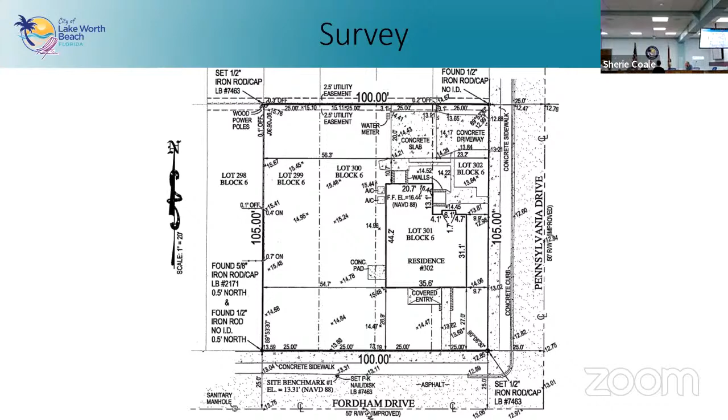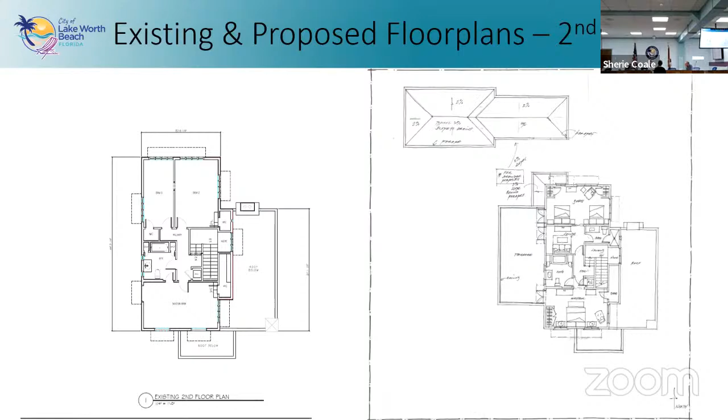If you could go to the next slide again. So here you can see the proposed new accessory structure would just be one story, and that porch addition would be used as a balcony on the second story, or a terrace.

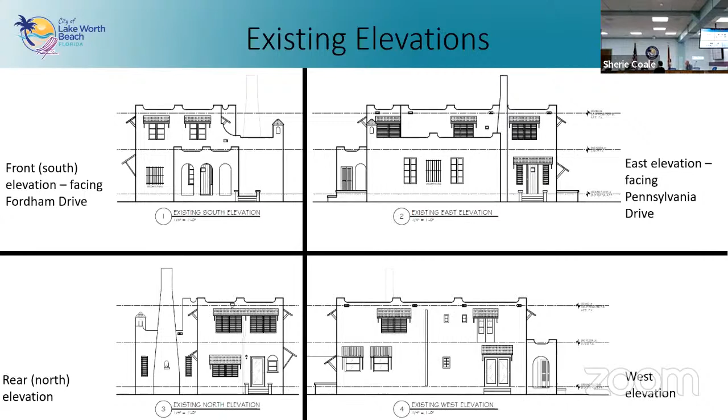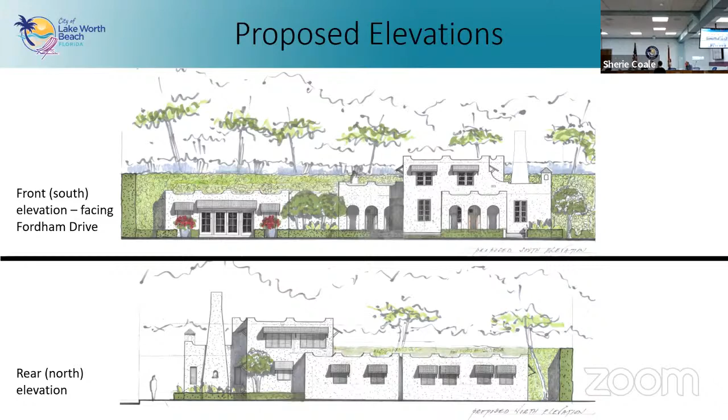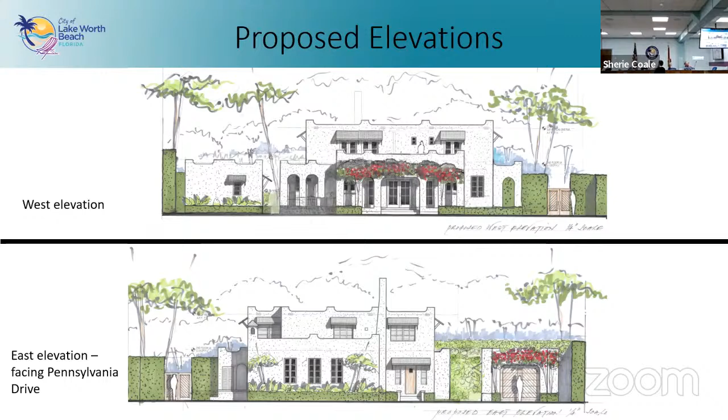If you could go to the next slide again, here we've got the other two elevations. You can see another side of that new porch, as well as the front of that proposed garage. One more slide, Aaron.

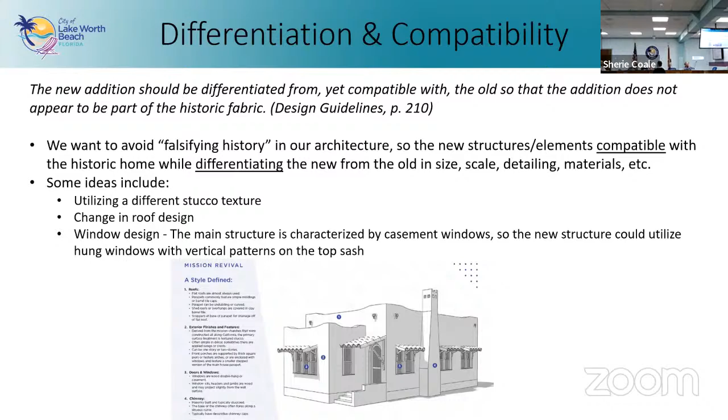It just shows that these are different, one and the other. Doing a different roof design if they wanted, maybe a tiled roof on the new structure rather than a flat roof with that parapet. Using a different style of windows that's still compatible. All of those things are part of the nuanced conversation of differentiation that we're still working on at this early stage.

We do have the architect as well as the property owners here on Zoom tonight, if you'd like to ask them questions or hear from them as well.

No, not based on - I've done a quick zoning check, and at this point, no, there would not need to be any waivers. As for the pool, it was shown on the existing plans, there's not currently a pool. They may at one point apply to put in a pool on that big side yard, but there's not one currently. Basically the back project is like pseudo guest quarters, a cabana house, and they'd get a pool in as well. That pool would generally be done at the staff level.

Right, yeah, shows the floor plan and then the... Sure, yeah. Aaron, actually, we do have the PDF of the floor plans, if that would be a little easier to zoom in on. Let's do that.

So we've got the existing, and then I think starting on page 4, we have the proposed floor plans. Here we go. Yep. So they've got the garage, the living area, bathroom, a bar. No, looks like a vestibule, little entrance.